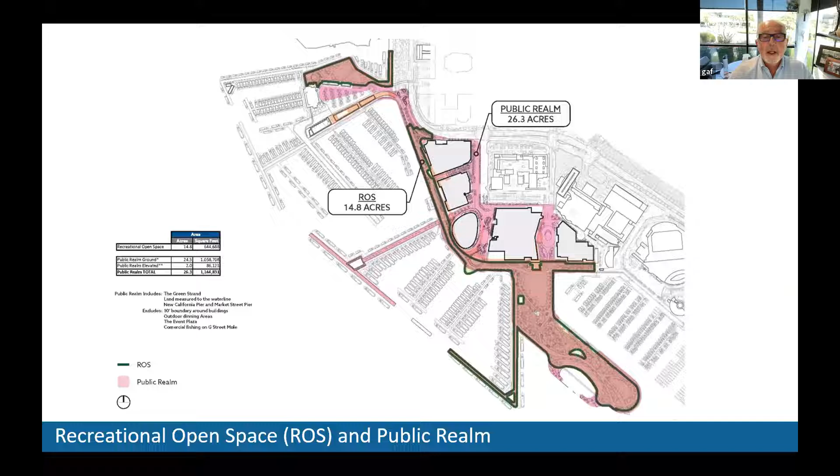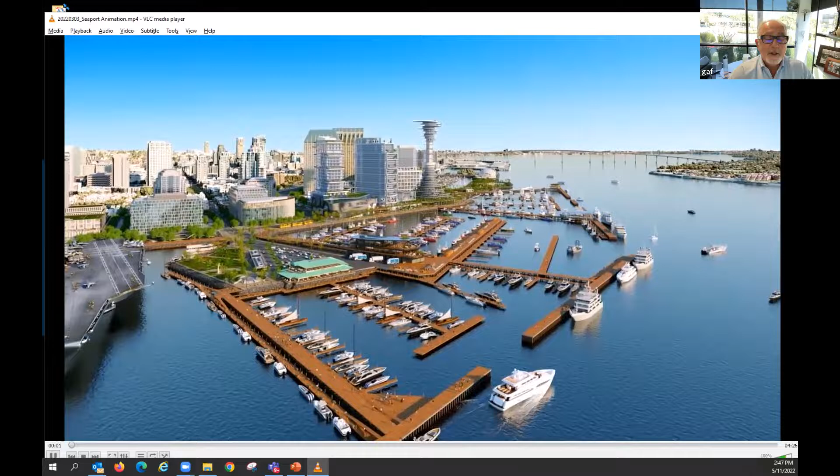I'll narrate this video as we go through. So this is from the north.

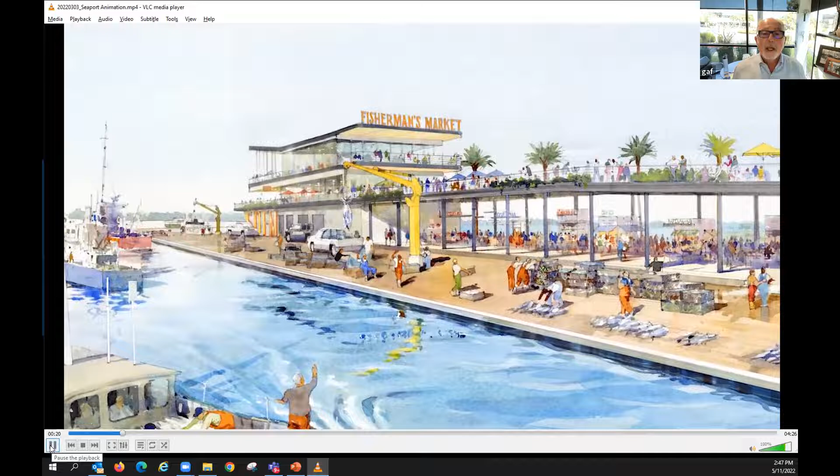You see G Street Mole, the fish market, the expanded Veterans Park that we're working with the Midway on. You see our fish processing building, the processing trucks moving out. A lot of the fish brought in today is really processed in LA; we see doing it here. This is our fish processing building.

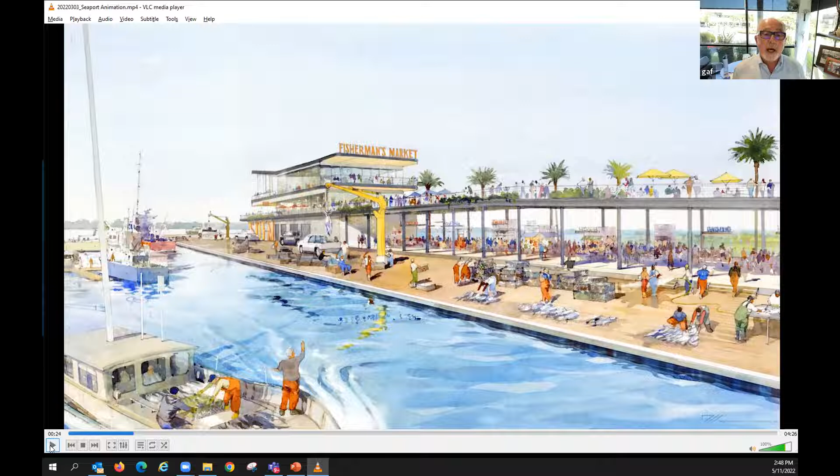The lower two floors are dedicated to commercial fishermen. The public will be able to view this from the elevated Green Strand in a safe location, but really be able to observe the commercial fishing activities that happen. The commercial fishermen are organized into a group right now. We hope they'll actually start selling fish 7 days a week. We're proposing a fish auction that they would be able to run. And then on the third level, you see the restaurant.

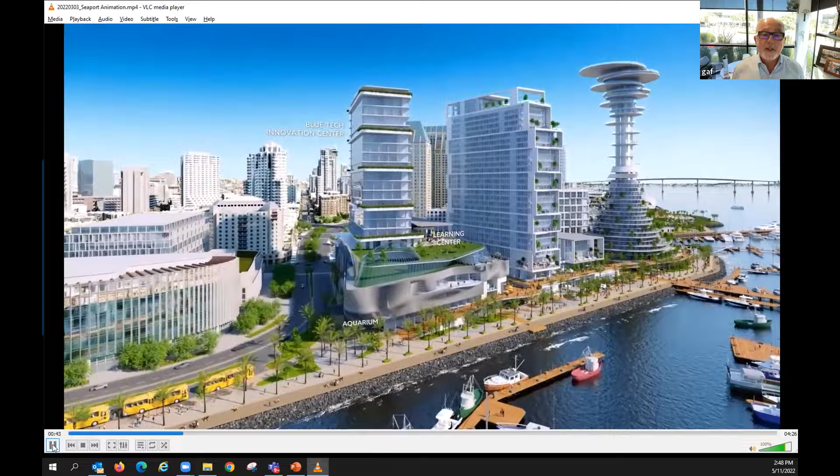As the video starts panning back out, you start seeing our blue campus, which is next to the IQHQ project, the aquarium at the base with 200,000 feet, our learning center on its roof, and then the Blue Tech Innovation Center, which is a partnership with UCSD Scripps for Blue Tech companies.

This is the base of the aquarium. We propose putting in a tide pool, very similar to what Birch has right now, where the public can actually partake in what's happening in the aquarium without having to pay. So it'll be an activity and activation that's really part of the public realm.

You can see how the boardwalk's been expanded from 25 feet today to about 80 feet, with space for biking, walking, and passive uses. This starts showing how the Green Strand elevates.

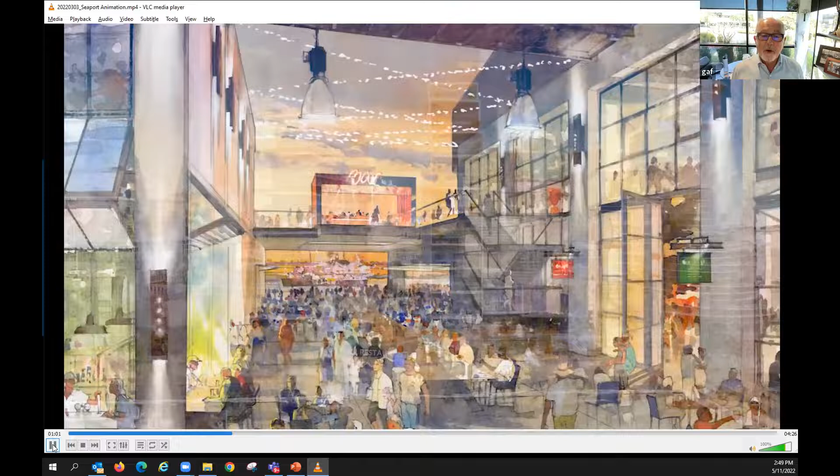Coming on around, you see our retail street, which connects the city to the water, a gritty waterfront street that takes advantage of San Diego's weather so that the retail stores and restaurants are all indoor-outdoor, so we can really appreciate the weather and, hopefully if we ever have another pandemic, not have to shut restaurants down.

Keep going, Teresa. You see the Green Strand crossing over in the background. As we come on around, you'll see our full service hotel, the Green Strand, and our iconic tower. This is the base of the full service hotel.

Again, you see the width of the boardwalk expanded out to 80 feet, with the Green Strand crossing over on the top right-hand side. You'll see that we've created pathways for jogging, walking, sitting, relaxing, and alfresco dining. We really want this boardwalk to be an amazing public space on the water where the public, for whatever activity they want to partake in, can find a space to do it.

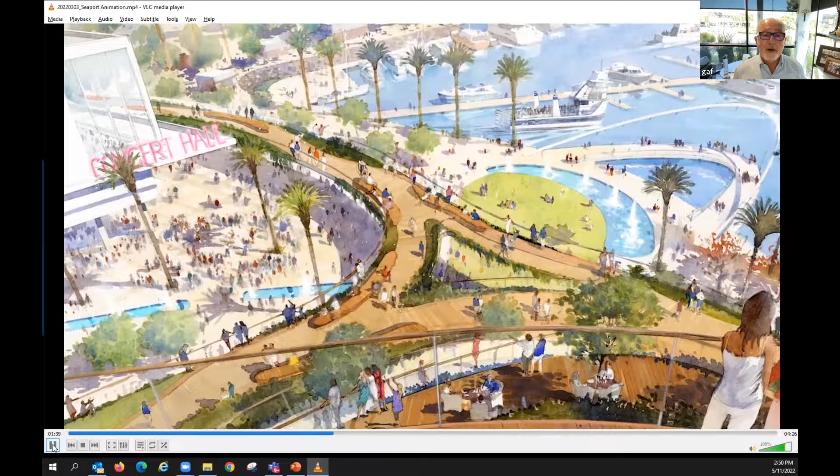Keep going, Teresa. Next, as we come around, you see our iconic tower, which has a hotel at the base and activities from the midpoint up. The activities will be restaurants, event centers, and so on. This is a view if you were a guest at the hotel in the tower, looking down.

The address of this location, whenever I say it, actually gives me cold shivers, because this is the beginning of Highway 1, the beginning of PCH, and a very significant point in California which relates to the whole history. So we really want to celebrate it. We want to create these multi-layered opportunities for the public to enjoy it, whether out on a promontory looking back, the High Line, or down at ground level.

You'll see the ferry. We propose bringing in a very robust waterside transportation system, potentially even a ferry from Oceanside, which we're looking into, to relieve some of the pressure on our highways. You see the concert venue—keep going, Teresa—our indoor concert venue, a 2,000 to 3,000 seat indoor event center. That's what you see here in the foreground.

You'll see more of our hospitality offerings—our affordable hospitality, a hostel, a micro hotel. We are really trying to build in hospitality that is not available downtown into the project. Over 2,000 keys in 6 different price points.

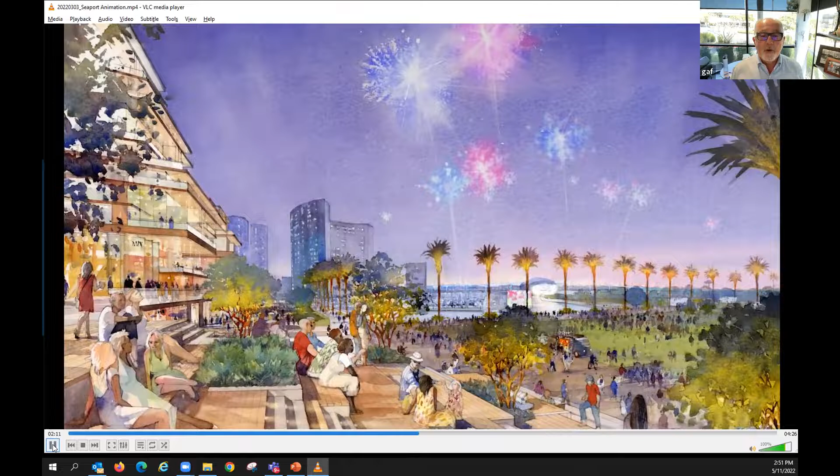This is our revisioned Ruocco Park. We've been working with the Ruocco Foundation to really revision it. They're not very happy with the existing Ruocco Park—they feel Lloyd, who donated the money for it, would probably turn in his grave if he saw what was going on there. So we really want to create this amazing, large public gathering spot.

This happens to show July 4th. You see the shell in the background and the public sitting on the steps outside the concert venue looking over Ruocco Park. Keep going, Teresa.

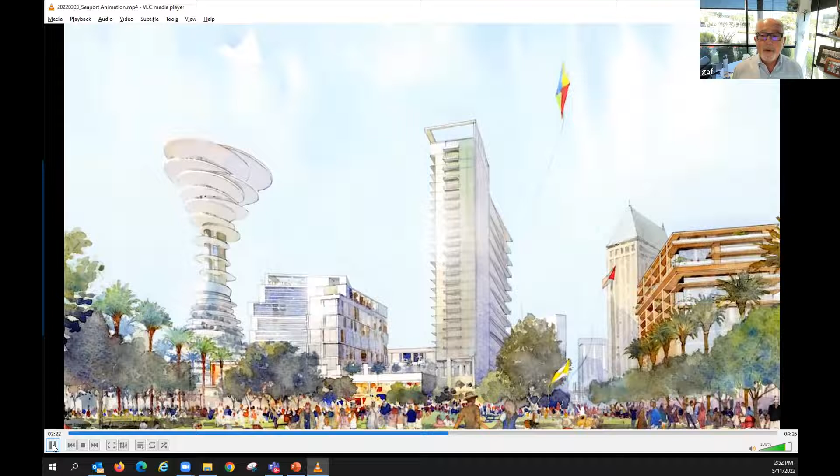As it comes on around, you'll see our luxury hotel. We're proposing to build a luxury waterfront hotel, and you start seeing the project from the revisioned Ruocco Park looking back at it. You'll see how we've broken up the buildings to hopefully create view corridors. Although the buildings are tall, our FAR is under 2—about 1.7—so not a very dense place at ground level.

Keep going, Teresa. The project then pans out. You'll see the revisioned Embarcadero Marina Park South, where we propose nature play, educational play, a reconstructed wetland, and a new beach that we hope will be a major amenity for visitors and downtown residents alike.

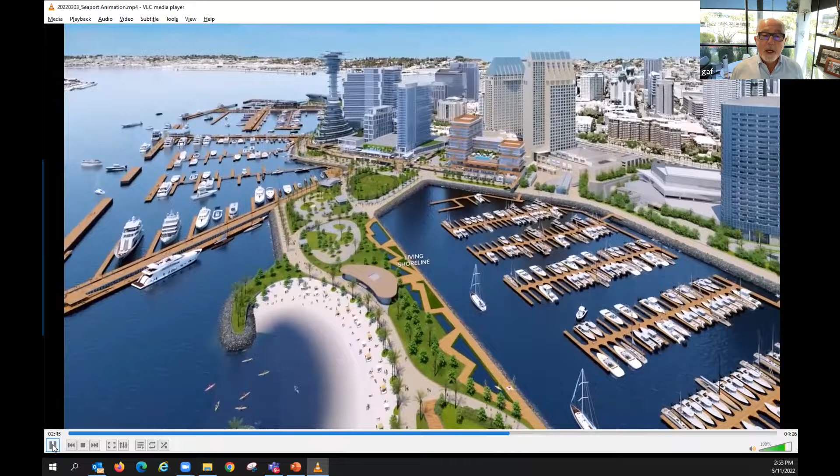There is no place to really come down and enjoy a beach right now. It was actually smaller, but it's been expanded, and we also see the bikeways traversing this. This is a vision for what that beach may look like for active and passive recreation, for launching kayaks or paddle boards.

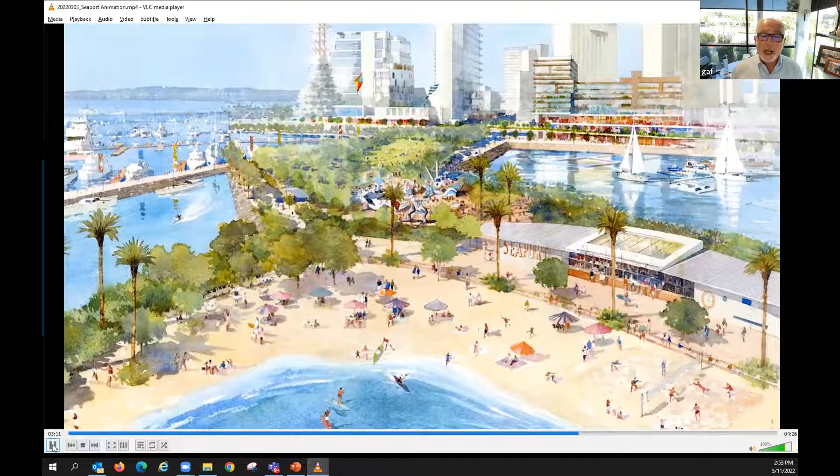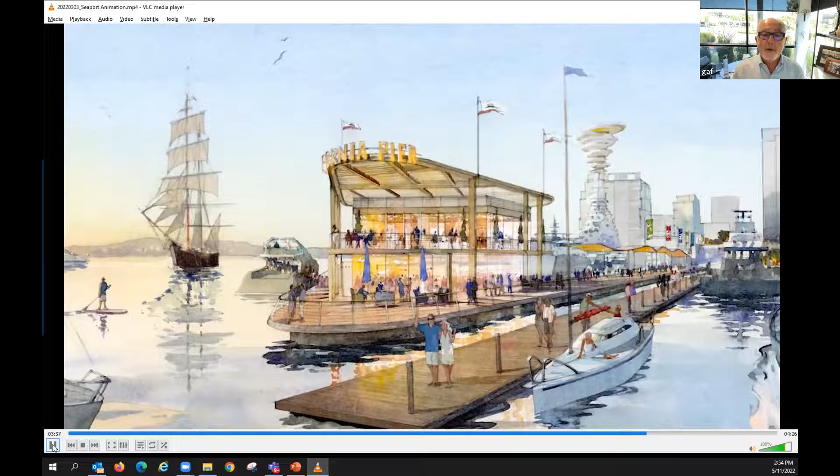And then as the project pans back around, you start seeing it in the context of downtown. We've really tried to knit this into the fabric of downtown. So although the tower will be iconic and very recognizable, the buildings to me feel like they fit. We've stepped them back and forth so that they really have the setbacks and step backs that make it part of the fabric of downtown.

This is the California Pier. It's the extension along the side of the Embarcadero Marina Park, a place for transient boating, for taking a stroll and watching the sunset, or a place to enjoy a meal out at the restaurant on the point.

The project then continues, and again, the bird's eye view kind of focuses back around, and you see the waterside as well as the integration of the project into downtown.

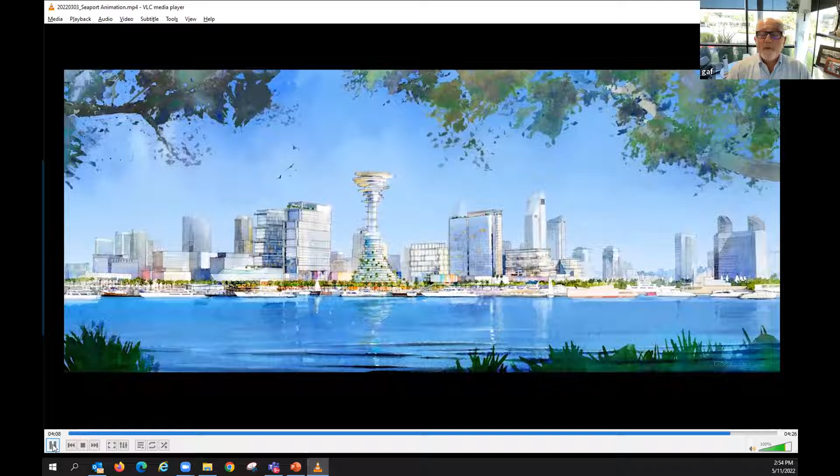The current schedule, all things being equal, is that we hope to break ground in 2025. We anticipate if the project can get built out in one phase, it'll obviously have to be logistically phased, but it's about a 5 to 6 year build out. The budget right now is close to $4 billion. It's amazing how it's grown for a number of reasons, in cost increases and everything else.

But I have to say, I feel incredibly privileged being a downtown resident to be stewarding this going forward with the team. We have an amazing team. The port has been amazing to work with as we've taken this forward, very collaborative, and our investors and our whole team, there's not much else on their minds right now but to deliver this. And we want to make biking and bikeways and outdoor recreation a key component of this, but do it San Diego style. That's the commitment, and that's what we're trying to weave into the project.

So I'll stop there and turn it over to any questions people may have.

Well, thank you so much, Mr. Gaffen, for this really comprehensive presentation and going into the details. I think it's really important, even though this is a bikeway committee that focuses on active transportation, that we get all the information about all the different uses and the intensity of the uses. And so that's really important for context. So with that, I'll let staff see if they have any technical questions for Mr. Gaffen and his team before we move on to member and public comments.

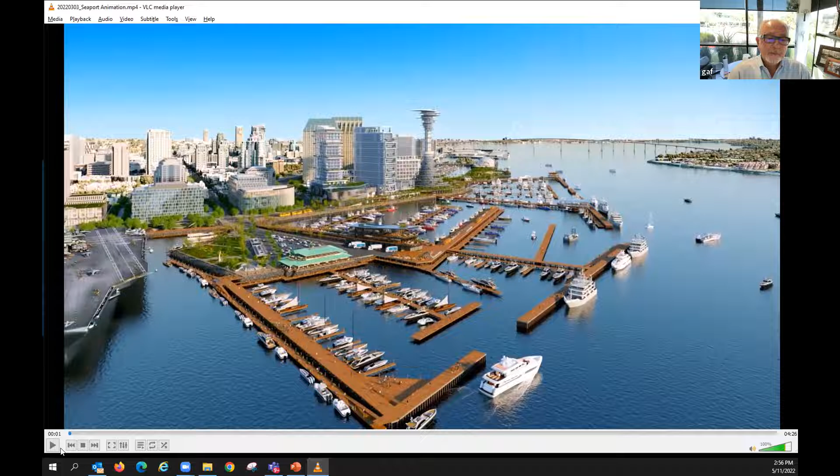Appreciate that. Thank you. So with that, Josh, did you or staff have any questions at this point for Mr. Gaffen and his team? Please call me Gaff, not Mr. Gaffen.

Hey Gaff, I'm glad that you're coordinating with the Bike Coalition, who are such great partners, activating the Bayshore Bikeway with annual Bike the Bay rides, which can put as many as 4,000 people on the Bayshore Bikeway for a morning. And so I wonder, in light of some of those phenomenal but annual events, how much consideration has been taken about keeping higher speed modes separate from the lower speed walkers, joggers, or people just taking in the view along that boardwalk. We in this working group have talked about the increasing popularity of e-bikes, for example, and their higher mass and higher speeds, of course.

So yeah, it's very much on the top of mind. OJB, our landscape architect, is working on the outdoor space, and we propose putting in actually separated pathways for the different speeds and activities that would be there, so that we keep everyone safe, but also enable everyone to enjoy it, whatever vehicle they're using. So that's part of the reason for the expansion of that water edge from the 25 feet right now, which does not allow bikes, to the 80 to 90 feet. In addition to that, there's the green strand. So as we work through the details on this, we do have some conceptual details of how those dividers work, and there's some examples in other parts of the country that we've been looking at, but that's definitely part of the thinking.

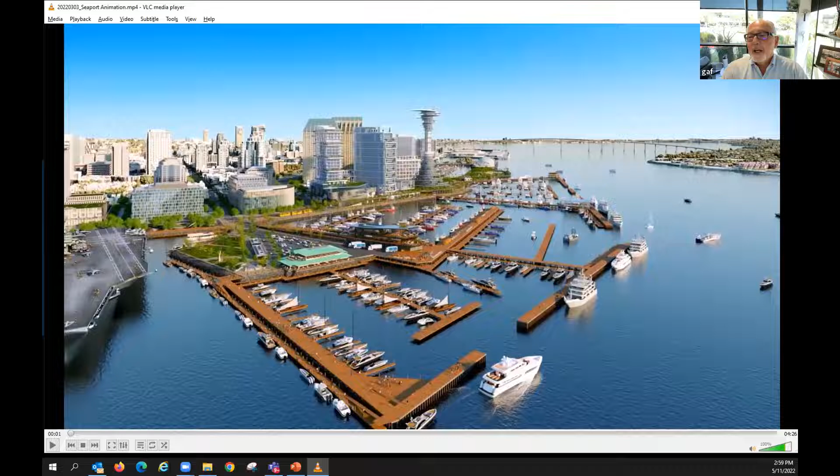Yeah, we do have it. If you look at the renderings, and maybe Teresa can bring it up, you will see bicyclists there. But this is purposely a little vague, watercolors. But if she brings up those renderings, I made sure that we did show the cyclists on the boardwalks as well. But we can send you a more detailed diagram of how that's going to get separated and segregated. So I'd be happy to follow up with that.

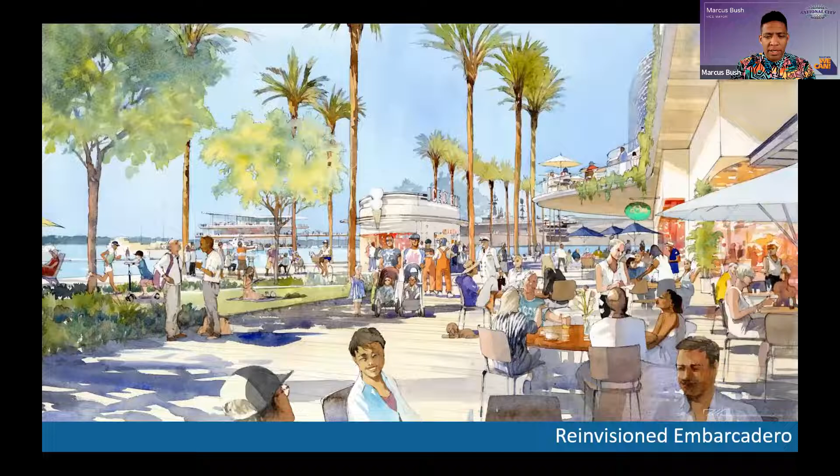Yeah, I think with this image, for example, that looks like the elevated walkway. Is that what the Bayshore Bikeway is going to be used for? You see this one here with the cyclists. The intention here is, and obviously it's not as clear as it could be, but it will be separated.

Okay, Teresa, go back to that one, and I think there was another one as well. See that one there? Got it, yes, sort of. So maybe following up with maps so that part is more clear on where the bikeway would go.

And then my other question, before I turn it over to some of the working group members, is I didn't hear anything about the trolley, the Seaport Village Trolley Station. A lot of folks in the area that use the trolley might not bike all the way from their house to the site. For me living in National City, a lot of times we would ride our bikes to the trolley, so that first mile, last mile issue, and take the trolley over there. Are there any bike paths or pedestrian connections or improvements from the Seaport Village trolley station to this project?

Yeah, so Teresa, can you bring up that site plan? This presentation is everything on our property lines, on site, but we've also been looking at potentially some crossings of Harbor Drive, which right now, you take your life in your hands when you cross. We actually have some studies of pretty innovative traffic circle type ideas used in other parts of the country to make it easier to traverse from the station, which is just a block away. I thought it may show it on here, but it doesn't.

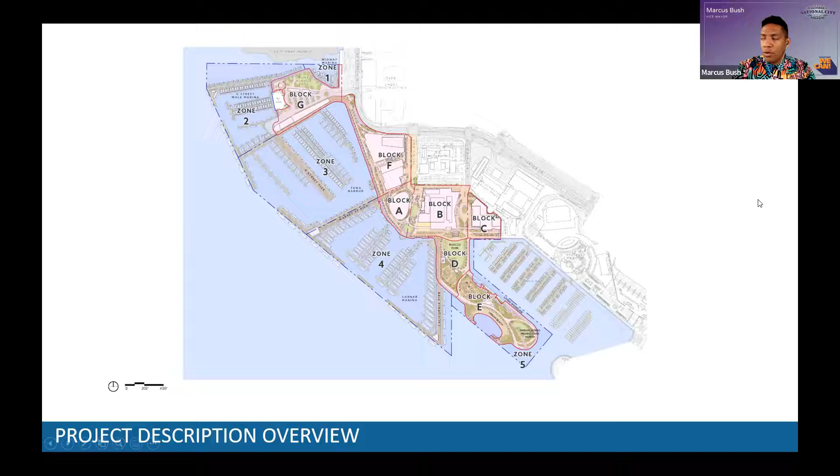Great, so we'll close out on this item. Thank you, Gaff, for coming and presenting to our working group. I think it's still early and kind of still concept. It looks like you guys are still working out where some of the infrastructure is being planned in the site plan. But I think you heard from staff as well as member Hanshaw about needing to identify more, being more clear about what some of the active transportation amenities are, where the Bayshore Bikeway is actually going to be included. That part is really missing.

Member Hanshaw asked for more identification and consideration for secure bike parking and amenities. Like you said, I've seen this too around our Bayshore Bikeway, that it's sometimes random, spread out, the racks, but it isn't comprehensive, it's not strategically placed. So consideration of that, and using some of SANDAG's current regional plan, the central mobility hub and some of the storage concepts they have there.

So yeah, just definitely want to second those, and what we'll do is have staff take notes, so that's for your guys' record. But overall, really want to thank you all for coming and presenting. Just to give my opinion on the project, I think it's really exciting. It's definitely iconic, and something I think that really puts San Diego as a region on a map.

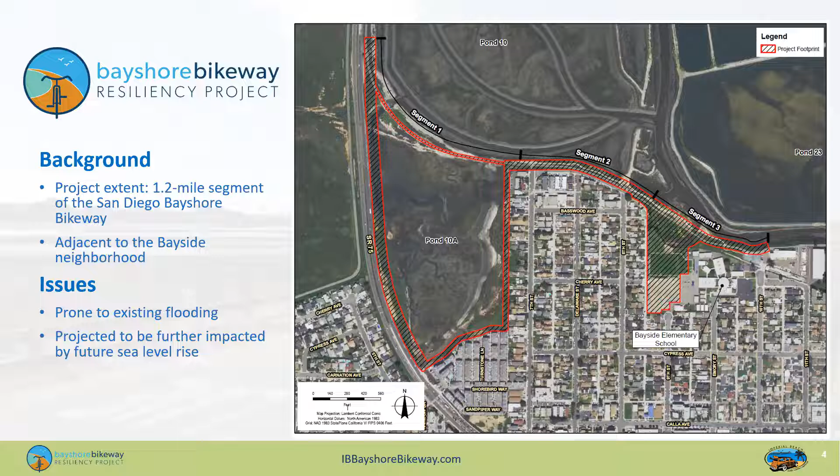So with that, I'll pass it over to Brian Leslie, who'll be going through the next slides.

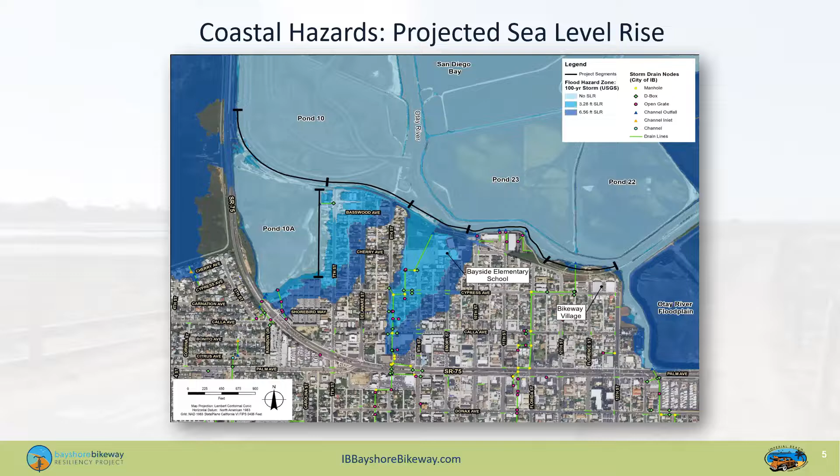Thanks, Megan. I want to start by explaining a primary component of our project, this living levee you've heard about. The living levee is within each of our project design segments and each of our concepts. At a high level, it's intended to provide flood protection to the community while providing space for the existing high quality habitats within our bay to migrate upslope over time with sea level rise.

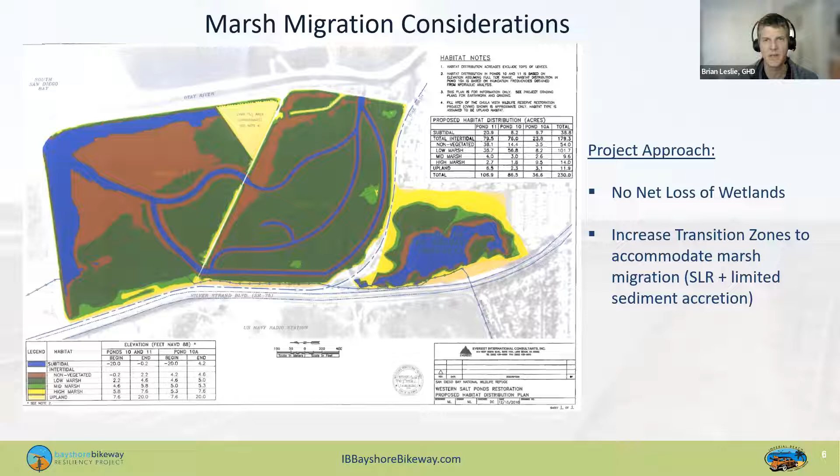This image is busy, and I apologize for that. It depicts existing habitat types within one of our key segments between Pond 10 and Pond 10A. I want to draw attention to the mid and low marsh and existing high marsh areas — the dark evergreen to light green, and the yellow. Where these two are squeezed together, especially along Pond 10 and our bikeway, these marsh areas don't have space to migrate upslope over time. So we want to give broad, shallow sloped yellow areas so that our marsh areas can migrate naturally over time.

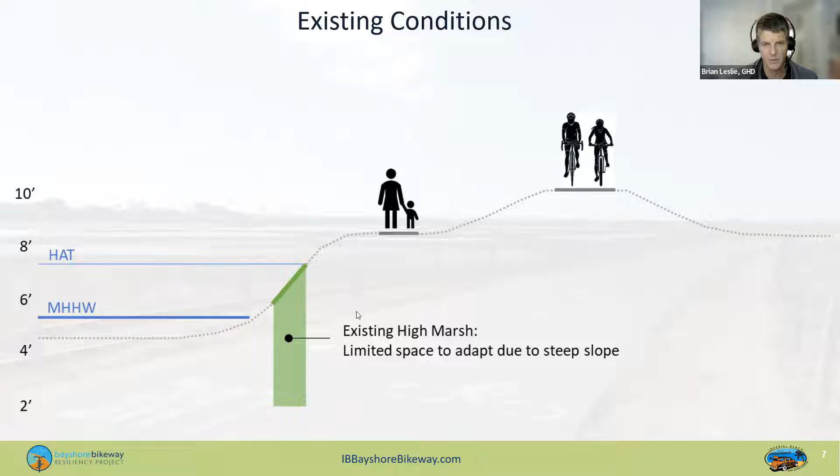In the next slide, you'll see how creation of this shallower slope works. Next slide, please.

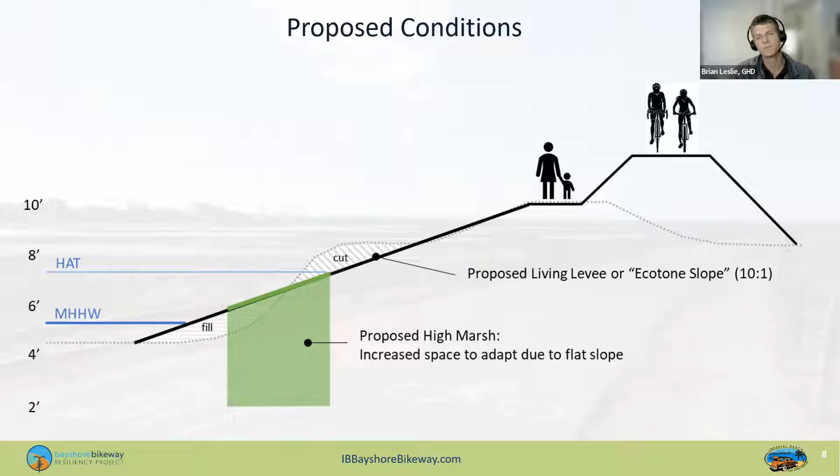So the ecotone slope or living levee concept brings in a shallower slope of 5:1 to 10:1 to create this broader area almost immediately. So you add existing high marsh immediately, and then by doing this balanced cut and fill, you'll see in the next slides how sea level rise plays into this.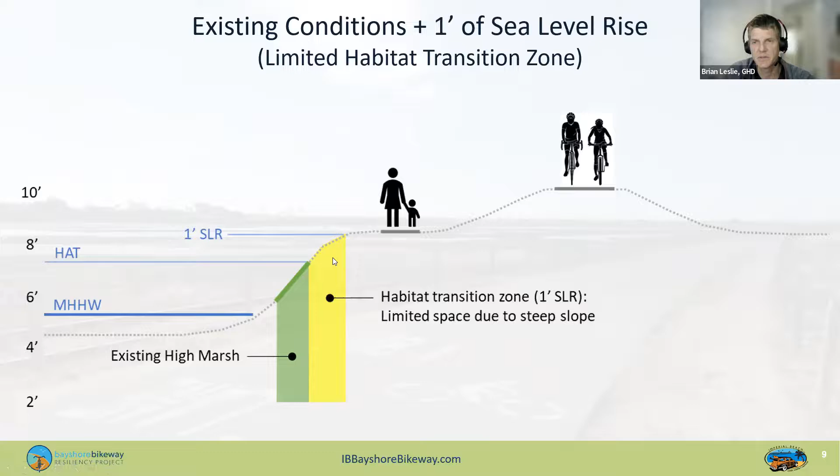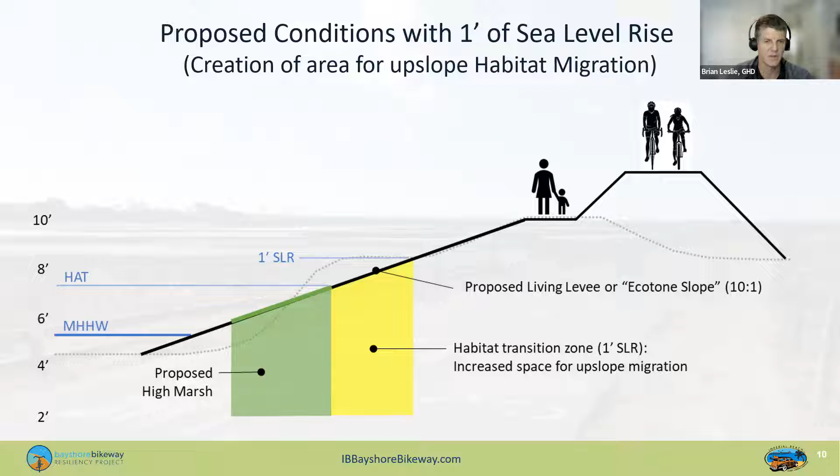So the proposal would create this shallower slope where the high marsh could transition upslope with time. This demonstrates what 1 foot of sea level rise would look like. It would preserve that space with 1 foot of sea level rise, and even have adequate space for future greater projections of sea level rise.

So I wanted to explain the living levee concept and then go through the different options that we're considering for each of our 3 segments.

Our first concept is to construct a living levee along the existing bikeway alignment between Pond 10 and Pond 10A. This concept has a benefit of taking advantage of the existing developed corridor, which would lessen new impacts. However, a key disadvantage is that this option would not remove tidal muting into Pond 10A.

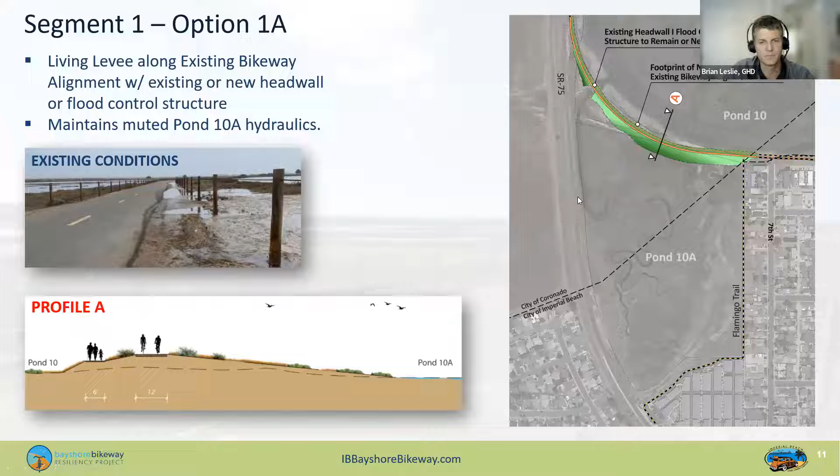Pond 10A is muted at the moment, which means that tidal flows coming into this pond are constrained, kind of like a pinched hose. The existing flood control structure on the bikeway is what does that, so high tides don't get as high, low tides don't get as low. Basically, this muting is a negative for both habitat and wildlife within that area. So removing this tidal muting would reconnect Pond 10A to the bay at a high level, which is a clear project benefit.

Now I want to step to the next option, option 1B. This option would remove tidal muting through creation of a new bridge. We basically bridge the Class 1 Bayshore Bikeway with a new, kind of widened alignment that would allow for the different user groups, both pedestrian and bikeway users. That would have the key advantage of removing the tidal muting and providing this new connection to the bay.

Once we do that, we have the key challenge of adding a flood protection element to the Bayside community, so we need to bring in the living levee concept along the Flamingo Trail. That green segment would be the living levee that would add elevation and flood protection to the Flamingo Trail.

Option 1C would reroute the existing bikeway around Pond 10A. We're calling this the ring levee concept. It essentially removes the alignment between Pond 10 and Pond 10A and has the bikeway route around instead.

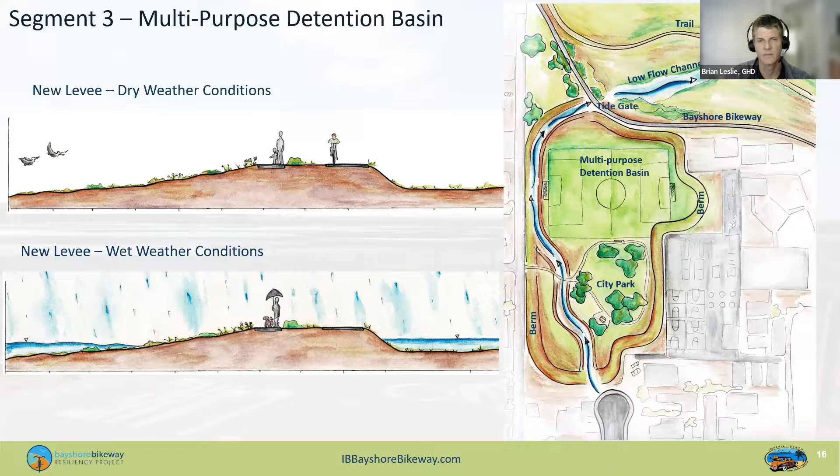Great, thank you Brian. I just want to quickly talk about following up on what Megan said about the public outreach. As part of this project, we're looking at coastal resiliency and public access. The City of Imperial Beach also found this to be an opportunity to go out to the public to talk about general activation of the Bayside neighborhood.

There are a few parks there, there's Teeple Park, but they were looking at opportunities to increase recreational access for this area, and also to ask the community what more they would like to see here.

So what we've done is ask the community about public access - how do they get there, what roads do they take, do they walk, do they bike, do they park, and what issues they have around this.

And then we were looking at how that's connected to the rest of Imperial Beach, and how it's also connected to the City of Coronado, Chula Vista, and National City, to get their feedback. We also asked them about activating the area.

Once again, using these exercises, we identified 4 or 5 unique areas. There's the Flamingo Trail Gateway area, as we're calling it. This is near Pond 10A.

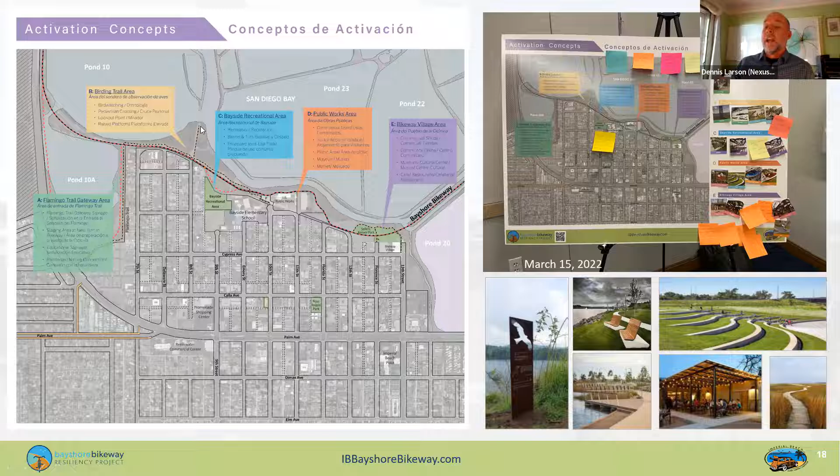There's a birding trail area - this is actually where U.S. Fish and Wildlife has proposed an actual birding trail for ecotourism. There's also this Bayside recreational area that Brian was just discussing, where there's this floodable park.

I want to point out that A through C are the current coastal resiliency component of this project. We looked at the entire area, but found out we didn't necessarily need to focus on areas farther east of the public works area or the school.

But from a recreational standpoint and activation standpoint, we still want to ask the public what they think about what we can do in the public works area or around the Bikeway Village area, which has been very successful. So we had exercises where they could use post-it notes to give us comments, and they also had these cards.

You'll see these images in the bottom right - these were actually turned into small cards that people could take and go paste or pin onto the board, into the area where they wanted that activation piece to occur.

So for example, in the public works area, we heard quite a bit about having places to sit, places to view the water, more of a park-like setting.

What types of activation would they like to see? Do they want small restaurants, breweries, hotels? Those are the kinds of questions we're asking, because it's really much more of a visioning exercise. There is really no project here, but it helps the City of Imperial Beach understand where projects may go and where their larger long-range planning should be focused.

One thing I did want to point out, and this came up from the discussion earlier, and Megan already pointed this out, is that the one thing we have heard consistently from the public, both in Imperial Beach and from people visiting, is about public safety. There have been accidents on the Bayshore Bikeway that this group is probably aware of. You have Rad Power Bikes, one of the bigger electric bike manufacturers, right at Bikeway Village. So it's good that it's more popular, but there are also a lot of users down there. Even during a weekday morning, not just weekends, there are a large number of diverse users. So public safety has been the number one thing we've heard.

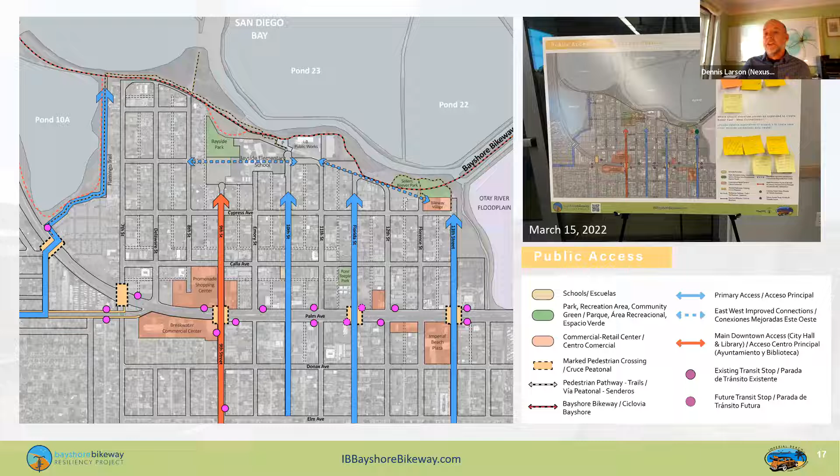There's big support for fully separating out a cycling path from what may be a more naturalized path, or just a separate pedestrian path. That's the biggest focus we have, and a future project is looking at having them be completely separate. I also want to show that one thing we're looking at is creating these nodes, like around Bikeway Village, where there'd be better signage and changes in pavement type, so that where cyclists, rollerbladers, runners, and walkers come together, people recognize that's a crossing point. That creates a safer area where cyclists know they need to slow down because there are other users there. So public safety is really the number one comment we've heard, and it's what we're addressing in everything we do.

So that's what I have for now. One thing I wanted to point out is two final things. One is that this project is funded by an Ocean Protection Council grant. The city of Imperial Beach has also applied for FEMA funding through the BRIC program, which stands for Building Resilient Infrastructure and Communities. We applied for that grant this last fall in hopes of getting the money to finish the final engineering design and complete the construction.

I also want to talk about continuing the outreach. We're trying something new called virtual office hours, doing three Tuesdays in a row from 6 to 7. We'll use Zoom, similar to Jamboard or Mural, so people can join in and ask us specific questions about this project and give feedback in a more informal manner. We're trying different ways of reaching people. We know we might be a bit in post-COVID territory, but we had a lot of positive response to virtual office hours because of people's schedules or ability to access them. So we're moving forward with that, along with other in-person public events.

So I'll turn this back over to you for any questions.

All right, thanks staff for the overview and presentation on this. We'll turn it over to see if SANDAG staff, Josh, had any comments or questions on this project or how it impacts the whole Bayshore Bikeway plan.

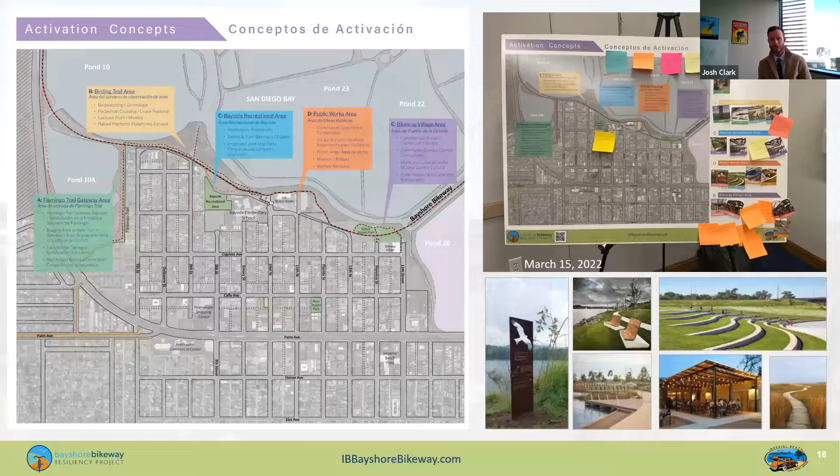Yeah, certainly. Thanks for the opportunity to speak to it. I was very interested to see the potential rerouting of the bikeway around Flamingo Trail, for example. It might take our top line summary of the bikeway from 24 miles to 25 miles, but I think that's totally reasonable. The route has changed before with building bridges, for example, and I do think there are two competing concerns—perhaps not competing, but the environmental improvements that can be made for flood control and the inevitable rise of tides, and then the improvements that can be made to the bikeway.

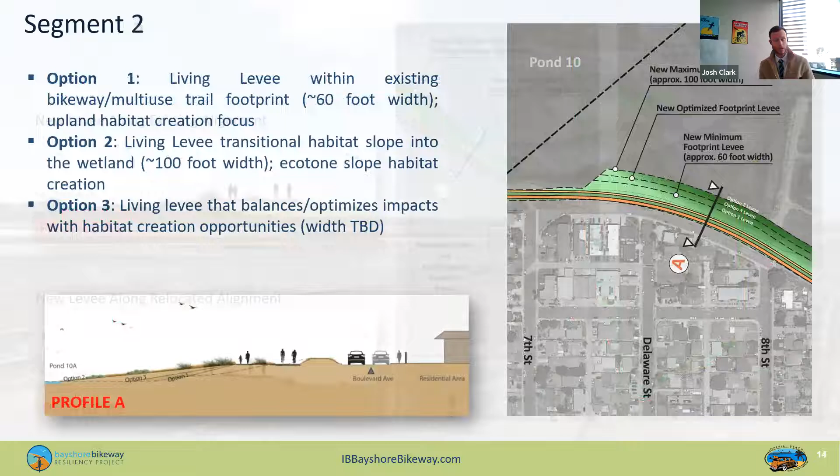So that's where I was wondering about the alternatives you've shown and how this group might be able to offer some input on which of those alternatives you move forward with, or what the process is for that. Because I do think that when it's a win-win, doing things like straightening the alignment of the bikeway so the visibility sightline issues going around turns are no longer an issue is ideal. So too is the aim to separate users by those modes. I wanted to get an idea from you all about how this group might be able to help guide the final alternatives selection.

And Josh, if I can jump in really quick before we get comment, there's probably two areas where, and we've been talking to Fish and Wildlife, Coastal Commission, the Port of San Diego, we've been engaging with a lot of different agencies about this. I think there's probably two areas that change, one slightly and one a little bit could be more drastic.

But for segment 3, one thing I want to point out, and this is what Brian talked about, there's kind of a realignment that occurs here. If you're familiar with the area, the U.S. Fish and Wildlife has a naturalized decomposed granite trail, and there's a small pedestrian bridge right in front of the school. We would actually realign this area.

Partly the reason for that is we want to have people have access to what will be, and the city of Imperial Beach is working with the school district about making the Bayside Elementary School a joint use park so the public can use it outside of school hours. So one idea is by realigning the bikeway, it gets better access to the park.

It also means two other things happen. One is there's this small area of wetland that's kind of disconnected from the rest of the bay, so it has environmental benefits of fully connecting the bay. The second part is that, as Brian talked about, there's an area when you're coming from east to west.

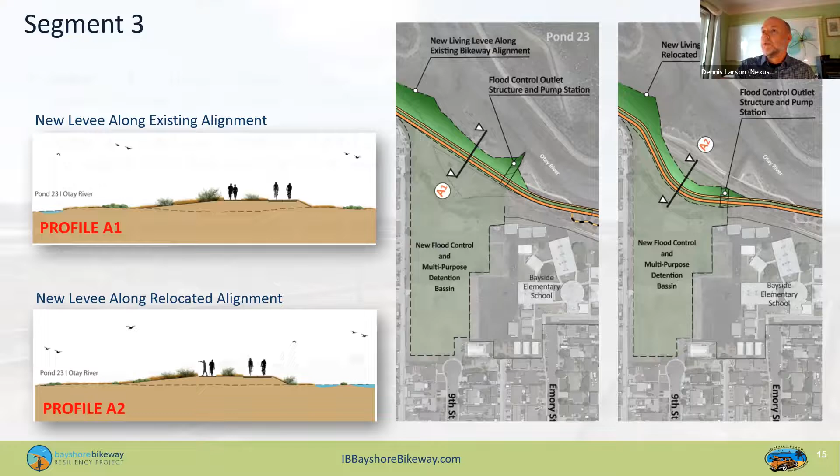So I wanted to get your feedback on options 1B and 1C, because in both of these cases the existing dike would be removed. One thing I want to point out is that this dike is in the City of Coronado, not actually in the City of Imperial Beach. We have been coordinating with the City of Coronado, and they were in agreement with us when we moved forward with this, that it made sense to incorporate this area within the project because the environmental benefits are so great from opening this up.

This is 60 acres in Pond 10A that's currently muted, and by connecting this to the bay, you're getting all the different species that can now migrate through the bay into Pond 10A. These were not natural to begin with, since they were all salt ponds, so this is really beneficial all around. But it's something the reason we want to bring up...

By the way, we are presenting tonight at the San Diego Bicycle Coalition meeting, the same presentation. They've had representation at the workshops we've had, and we've been engaging with them, and they've been very helpful about getting the word out.

It's something we want feedback on, because for example with option C, if you remove this altogether, you don't have this crossover, and there's a bit more of a sharper turn that occurs. It's something we would address in design using standard design guidance for what this turn can be, but we know there has been some concern from cyclists about the loss of that and what this turn might be.

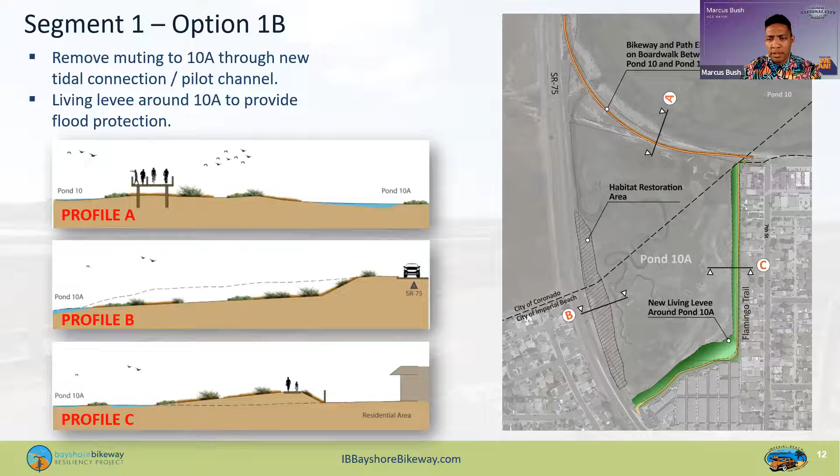Got it, Dennis, so question. On this option that is on the screen, option 1B, it would maintain the existing path, but then there would not be the second muting, where the tidal flows can enter in easier? Yeah, so actually, Brian, you may want to jump in, but with the bridge here, you would actually reduce the muting because you would remove that full earthen dike that exists now, and it would be an elevated bridge.

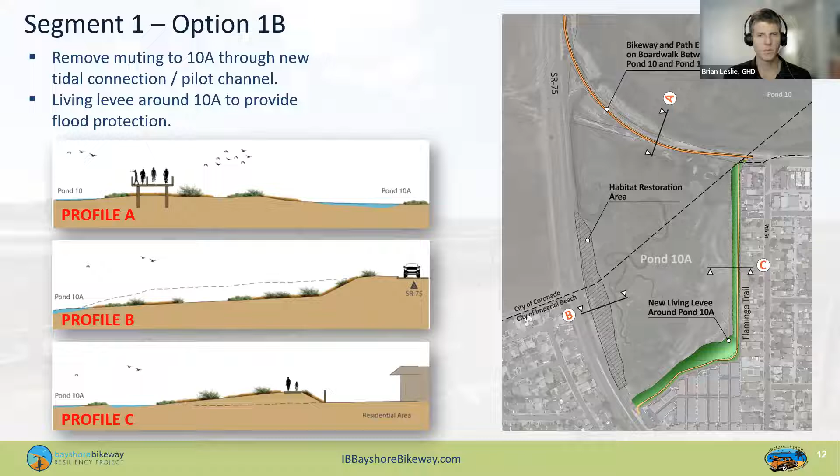Yep, that's right. I wanted to mention for 1C, that living levee we described, that would be an improved bikeway. So the Flamingo Trail as it exists would change. Like we make it into a faster speed? Well, there'd still be the turns we talked about, but the bikeway would be there with a separated trail, so it would be an improved situation.

It's a very good point actually, that for the width you see the bikeway right now, it ranges from like 6 to 8 feet, but we're planning for a minimum of 8 feet. So even down the Flamingo Trail, there'd be a separated bikeway, an 8-foot bikeway. So the width of the bikeway, at least the Imperial Beach segment, would be continuous for the entire length of the trail. And I guess a concern would be that a number of riders might just jump out to the highway at that point and skip that segment.

Yeah, I guess I could see that as a possibility, other than we're hoping they wouldn't, only because the bikeway would still feel the same way as it does in Coronado and the current condition it does now. But I do understand that concern.

And this, just to be clear, so this 1C, it would open a connection, and everything that's in gray, all of that would be basically removed, right? Exactly, so this would be just one continuous bay here. There would be no access across here. Got it, so it would be an opening.